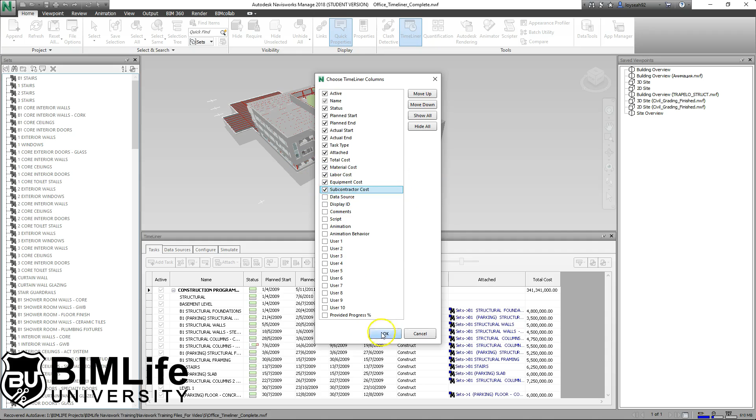Okay, so if you want to show this information, just check them and press OK, and you should see all this information here. We do not have equipment cost or subcon cost inside the CSV file, and that's why it's blank here. Although it's blank, that's fine. And that is the column settings. Remember it's here. And finally, just go to simulate again.

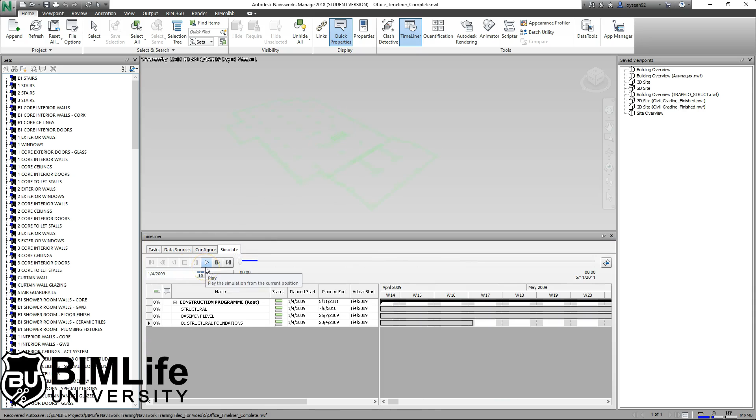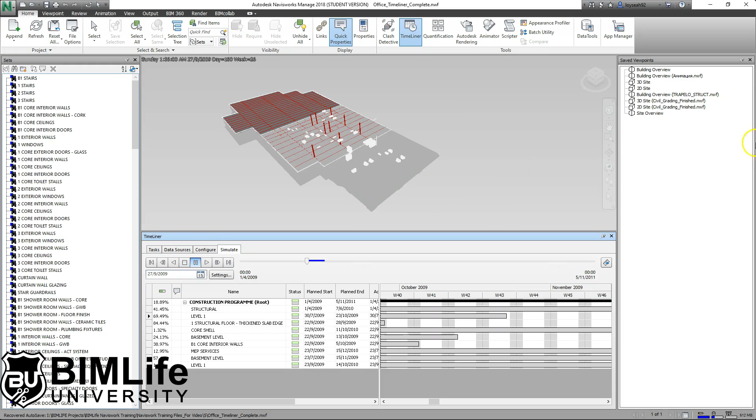And if you play the video, just notice that the dates are displayed at the top left hand corner, but it's also possible to show it in 4D with 5D, which means cost over time. Rather than just showing the sequence of building, you can also show the cost or the money progression throughout the construction period of the project. So in order to add the cost as part of your animation, you click on settings. And actually there are some other quite useful features in this panel.

One of them is, rather than viewing the entire construction sequence, you can limit it to certain dates or focus on a certain period that you think is critical. You use the option here, override start end date, then you pick the dates that you want the animation to start and end. Just now I was talking about adding the cost information as part of the animation. That is here, overlay text, click on edit.

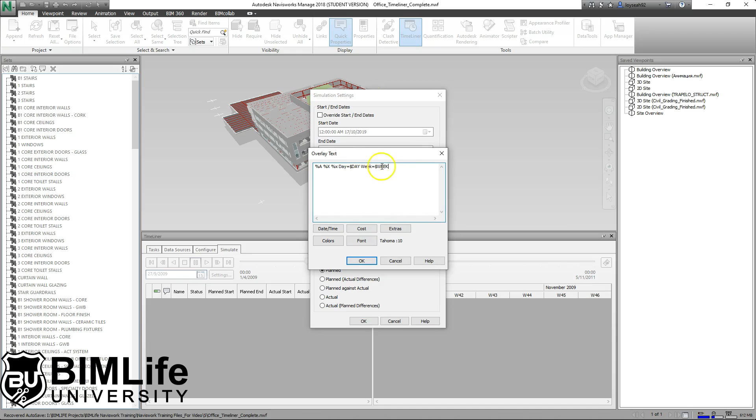You see this line over here is kind of like programming language. It might not make sense to you, but this line is responsible for this line here. That's how you get this line. We're going to create the cost information on the next line, and you cannot just press enter because enter means OK in this dialog box. You need to press control enter. Control enter will give you the next line, and you can type in maybe total cost over time equals to, and so that's the text.

Then click on the button called cost, and you can put total cost. So cost over time equals total cost. I find that the font is a little bit small, so I want to enlarge it. Click on font. Maybe I'll do size 16. It's too small, too bad for the eyesight. And then for extras, you can include the currently active task. I'm going to show you what this does. But before that, control enter again for the next line, and just activate this. So it comes here, $ task.

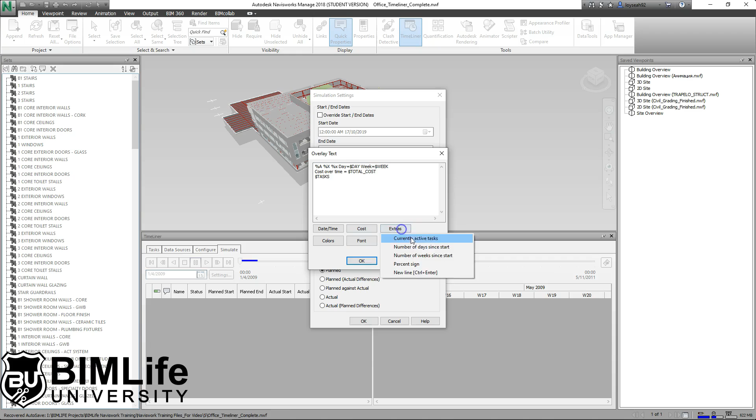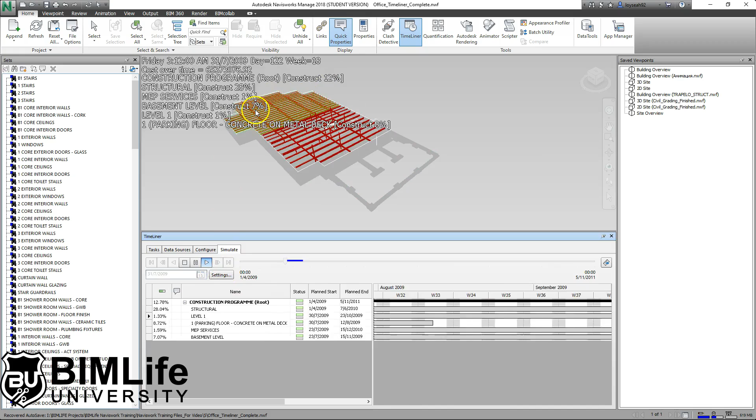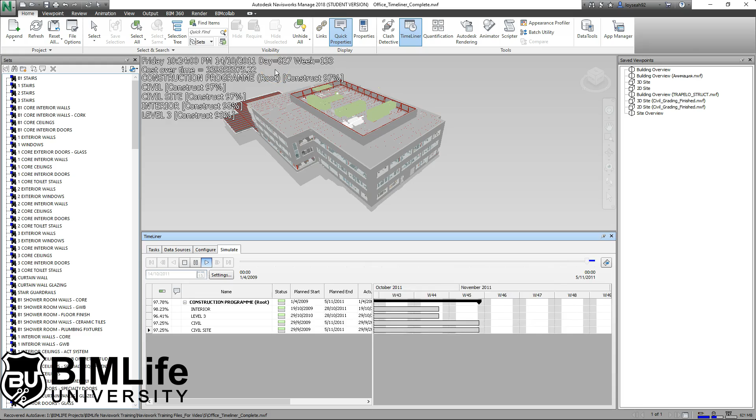Press OK. Before you even start playing, you can see structural, basement level, B1 structural foundations. Cost over time is 0 and day is still 1 because we haven't pressed the play button. Let's press play. You can see the percentage. It's going to be pretty fast on my screen. If you want to see the logic behind it, make the animation longer, probably 60 seconds or 2 minutes. But the basic essentials here are the time is moving, and the cost increases based on the construction program from an external file.

The last thing that you can do is export this animation. For example, maybe you want to send this animation to someone that does not have Navisworks. Just click on export animation here, and you can export in a few different formats. AVI is probably a good format to use. Just save it somewhere you can locate it, and as long as you have Windows Media Player, you can play the video even without Navisworks.

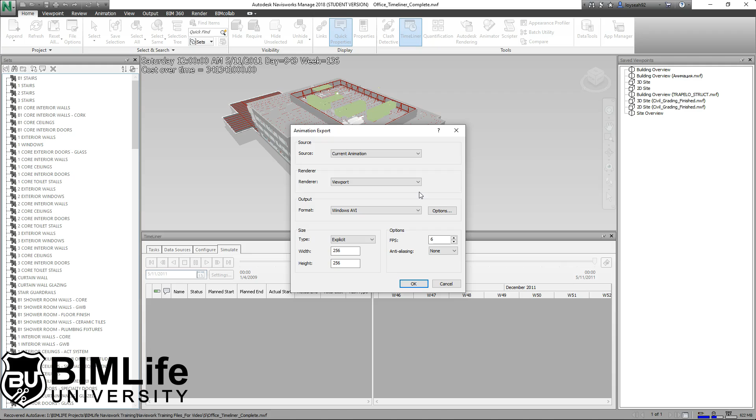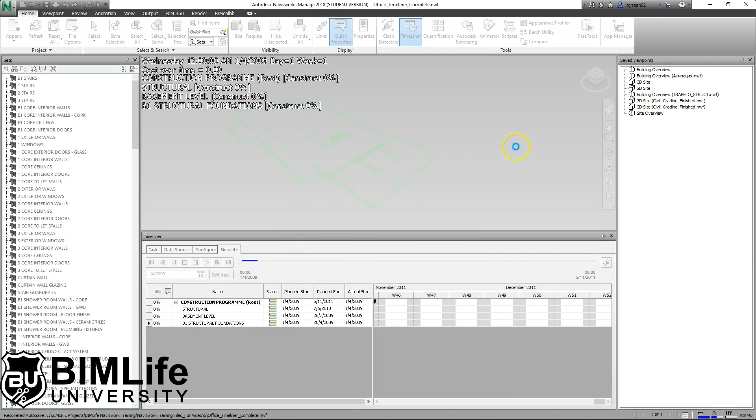So again, the export button is here. Oops. Okay, it's loading. Just wait a moment. It's towards the right side here. If you want to export the video out of Navisworks, use this button, and the name and the size can all be set here. So save your file, and this is the end of Module 3, the end of Navisworks Essentials.